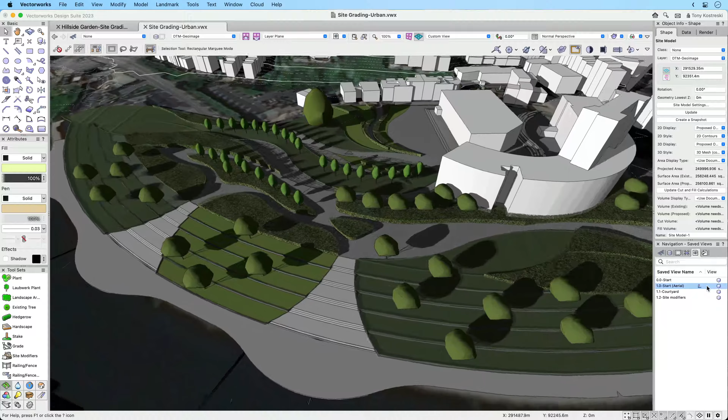Your site grading workflows just got more exciting. Experience the latest improvements and performance enhancements to site modifiers in Vectorworks 2023 that will increase your control and productivity.

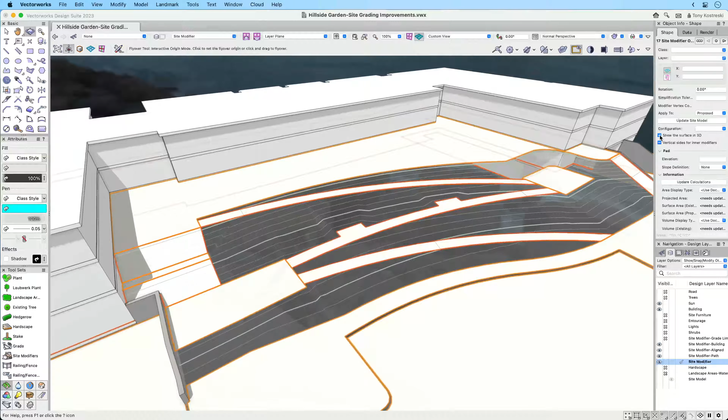with site grading. Every site modifier now defines its own surface and can even be displayed in 3D. This is fantastic for visualizing design surfaces on their own to verify your design intent.

We've also improved how the site model interprets site modifiers. You'll be able to place site modifiers in a more intuitive way. They could sit side by side, overlap, and even nest. The site model then collects all surfaces and stitches them together, creating true vertical sides at its edges.

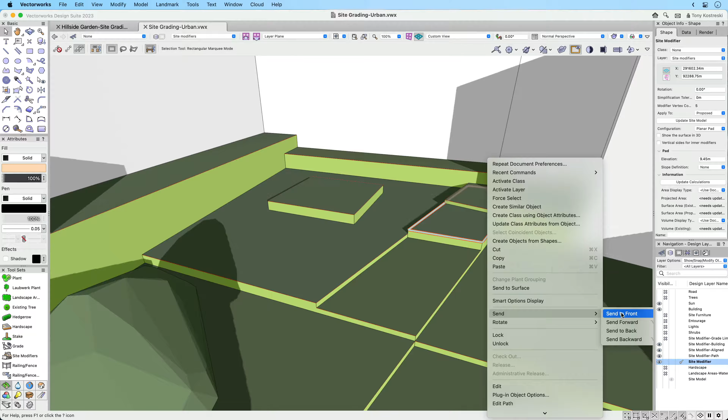When overlapping, the modifier in front takes precedence. When nesting, you can set the parent's inner modifiers to have vertical sides or transition smoothly in between.

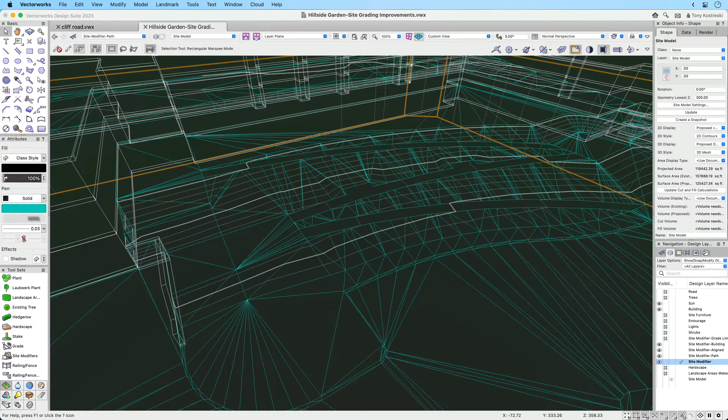You can also now create ring fences or protect inner areas from getting disturbed by placing grade limits within a grade limit. The site model has also been simplified, requiring far fewer points and related triangles. As a result, both improvements make resetting the site model faster than ever.

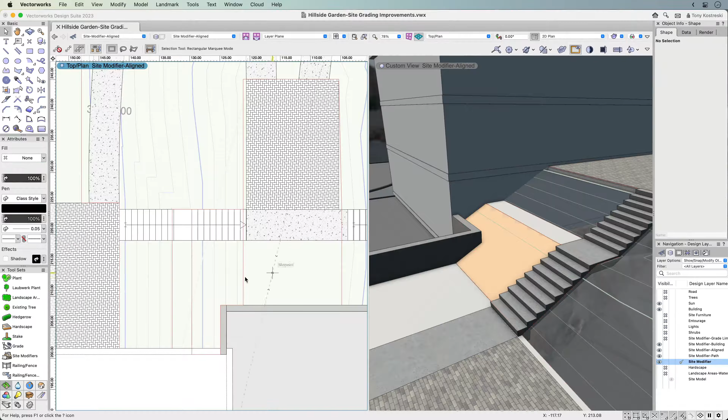We've added 3 new modes to the site modifier tool bar: aligned, pathway path mode, and boundary path mode. The aligned mode makes it simpler to create a surface between adjacent modifiers, regardless of whether they are planar or sloped. You can even fine-tune the shape of the surface by defining surface modifiers with stake objects and grade objects.

Making a path is easier than ever with the pathway path mode and boundary path mode. The first mode allows you to generate a path by drawing a center line and inputting its width, while the boundary creates a path by drawing a boundary.

Both objects function the same once placed in the drawing, and their 2D center line and 2D boundary can be reshaped with ease.

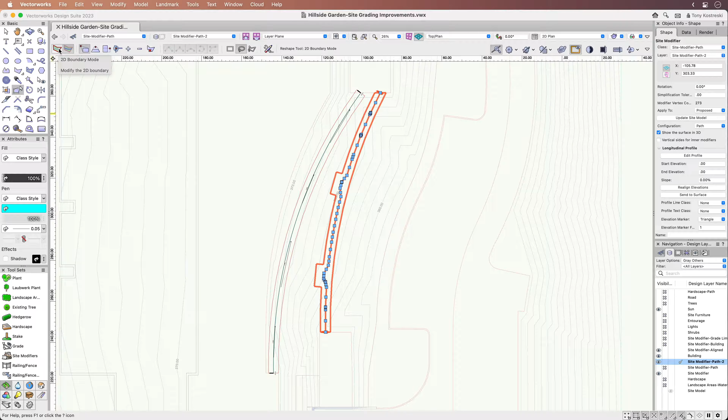Precision is made possible with the ability to establish exact start and end elevations, or inputting a specific slope to meet accessibility design standards. You can also automatically align the start and end elevations of a path to other surfaces, giving you immediate feedback on the path slope.

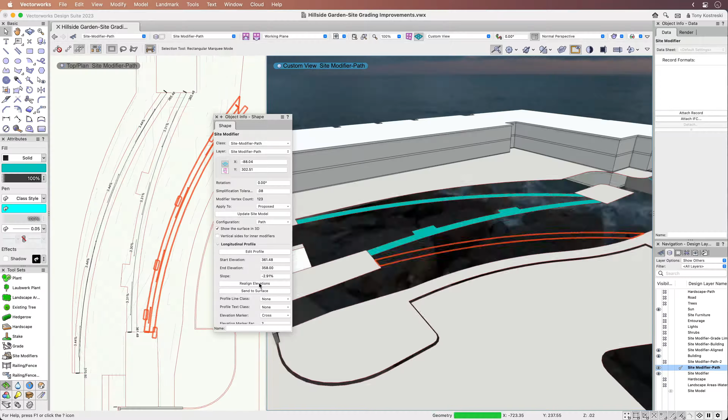You'll notice additional flexibility by being able to edit the centerline's path vertically. You can add additional points, set their elevation, or even control the slope between each pair of points. You can even snap these points to outside geometry.

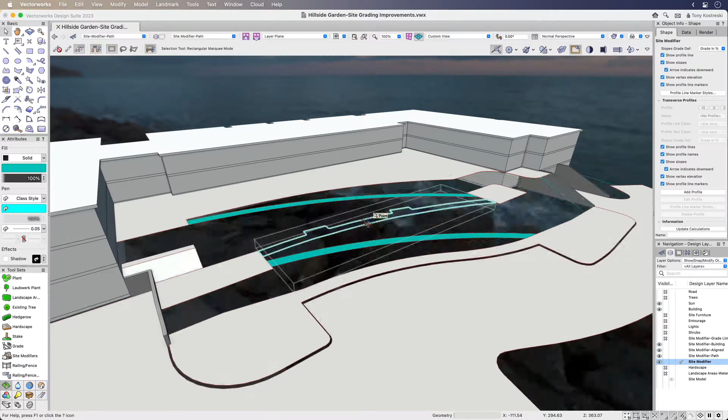You can also set cross slopes or create a crown by editing the path's transverse profile. Use one profile for a constant cross slope, or add additional ones should the direction of drainage need to adjust along the path. These same grade improvements can also be found within the Hardscape tool.

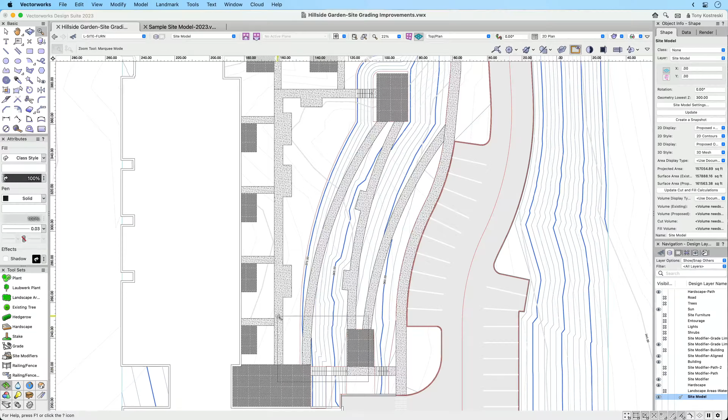They can be used to modify the site model or be used as standalone 3D objects like floating decks or bridges. Lastly, we know how important it is to have control over contours on a grading plan, so we added

additional functionality to the grade limits object. You can draw a grade limit around contours you want to fine-tune and simply edit them with ease.

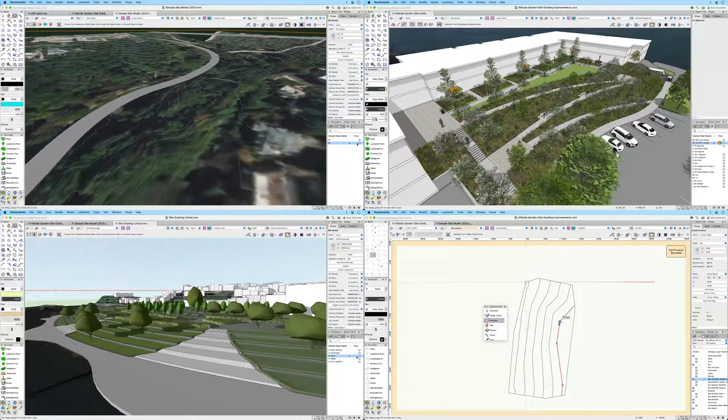By providing you with new ways to account for proper drainage, vehicular and pedestrian use, as well as better control through contour drawing and editing, you will spend less time on grading plans and terrain modeling and have more time to design.